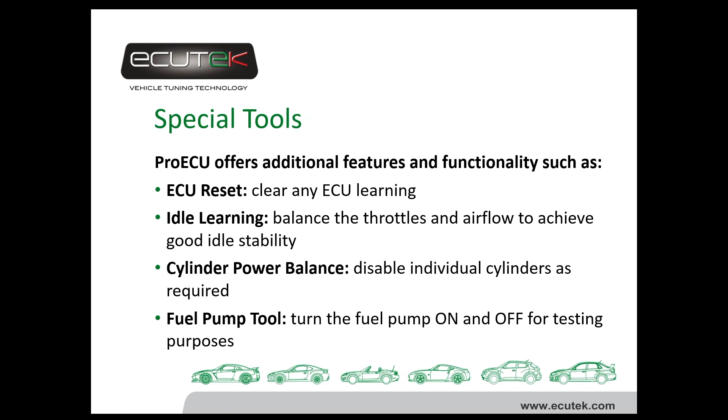The special tools menu is accessed from Tools, Manually Select Vehicle, Nissan 370Z and ECM Tools. You can see here quite a simple menu: ECU reset, idle learning and cylinder power balance.

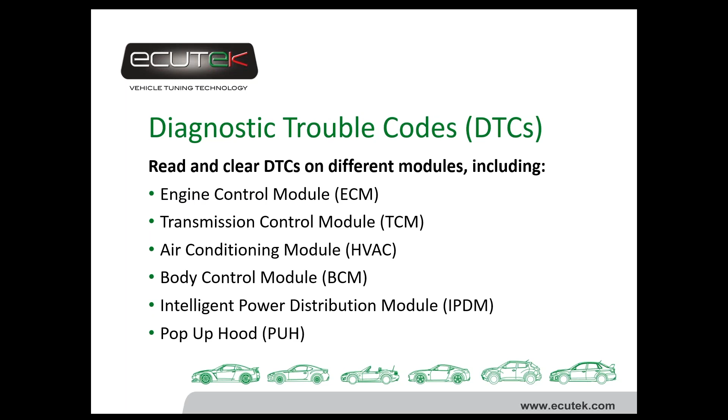ProECU also includes DTCs. We can read and clear DTCs on all the different modules on the vehicle: engine control module, transmission control for the automatic models, HVAC, automatic for the air conditioning, body control module, power distribution and the pop-up hood. This functionality is also included in the retail programming kits.

ProECU help is quite important. We spend a lot of time with the help files. They can be accessed directly from ProECU, or they can be accessed using Windows Explorer and going into the EcuTek ProECU help folder. The ProECU 370Z tuning guide has the map descriptions and most importantly the tuning advice. It's the sort of things that you tuners will be asking, and it's covered in the questions and answers, as well as more specific descriptions on setting up custom maps and which ROM to use. More in-depth questions are shown in the questions section.

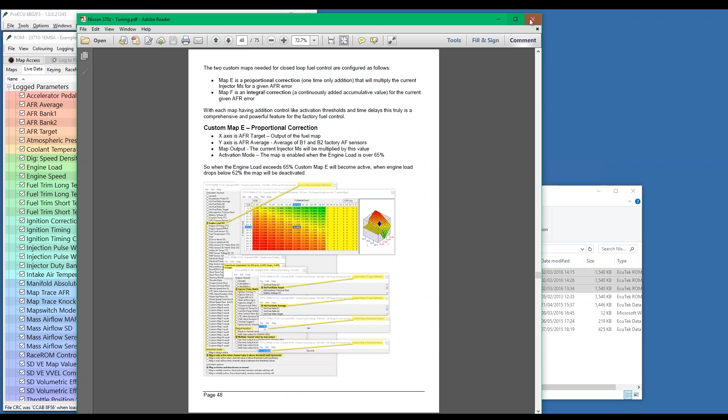For custom maps, there's a dedicated custom maps manual that covers custom maps. We can't put everything into the 370Z guide because some of the information is generic and may cover other products like the BRZ, FRS, GT86, the Subaru DIT and the Nissan GTR. We spend a lot of time writing the tuning guide and the custom maps manual, so please take some time to look through it. What we'll cover today is already covered in the tuning guide, so it can be used to cross-reference whilst the webinar is live.

RaceROM offers custom data logging. This is quite important. It enables us to log the ECU much faster than the factory Nissan protocol. We have a high-speed sampling rate of 50 Hz, 50 times a second. RaceROM importantly brings up to 70 new data logging parameters that are not available with the factory tool. The Nissan diagnostic parameters are pretty poor, and they don't even have things like knock retard shown. So the RaceROM parameters are very important to enable you to do good tuning.

The origin view shows at a glance whether you're logging an EcuTek parameter or a Nissan parameter. Many people are not aware of this functionality in ProECU, so when we're looking at the live data parameters here, if we right click on the name bar, you can add and remove certain fields. When we left click and add origin, we can see a new column has appeared, and OEM is a Nissan parameter, EcuTek is an EcuTek RaceROM parameter. If we click the tabs, we can order them in preference. So we can see here all the ones in red are EcuTek parameters, the ones in green are Nissan parameters.

This is the default logging view. If we close the default list and open all parameters, you can see all the ones in red here are the EcuTek specific parameters, and in particular all the custom maps ones are shown, and we lead on to

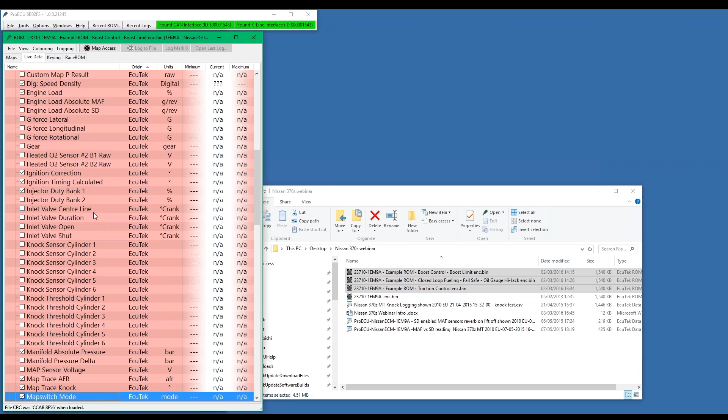more important parameters like per cylinder knock, the VVT and VTC and VVEL control, G sensors, engine load calculations, map tracing, torque demand values, steering wheel angle, and wheel speed sensors front and rear, as well as wheel slip ratio calculation. This is all done by ProECU, this is all done by RaceROM,

and is available to be logged as and where required. The default logging list again shows important parameters like injector duty, so we know if we're running out of injectors, map tracing, mass airflow calculated from the MAF sensor and also from speed density, as well as outputs of the SD map and the VVEL duration, compensation and the SD map.

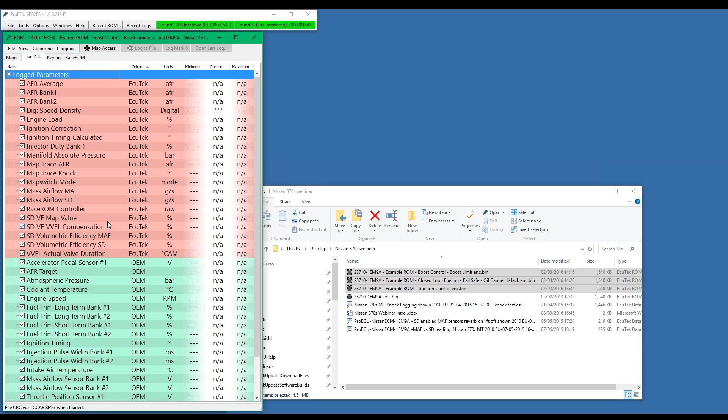Quite a basic level, but RaceROM feature files, the latest RaceROM feature files from a recent update are now available on EcuTek Update, and they're stored in the 370Z folder. We occasionally update the RaceROM feature files like we have done recently, and it's important that you use the latest version that's available from EcuTek Update. There's improvements, bug fixing and new features added, so it is important that you choose the latest one.

The latest version is currently version 2.1120. All the features added from the RaceROM feature file are shown under the RaceROM tab here.

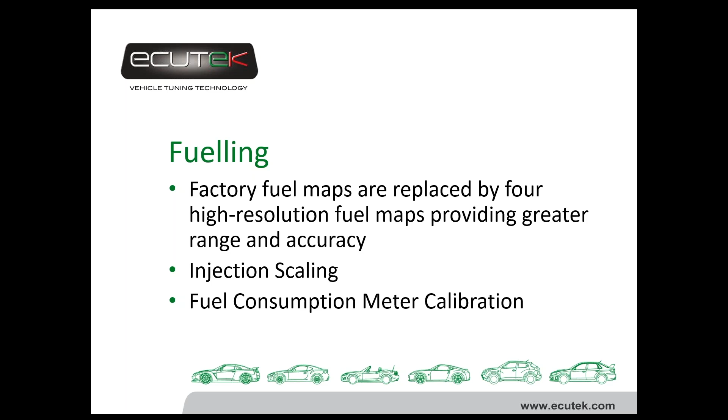Moving on to the maps, Nissan 370Z fuel maps. EcuTek's rewritten the fuel maps with 4 high resolution fuel maps. They can be used for greater range and accuracy. We have injector scaling, and we also have the fuel consumption meter calibration value. This will be used when we have larger injectors and should be recalibrated according to the size of your new injectors so that the fuel consumption display remains correct on the vehicle.

Maps by function. Fueling, we order by user level, and we can see the fuel consumption calibration byte is here, standard injector size. The high resolution fuel maps are significantly bigger than the factory fuel map, and you can see from this example at the top there is the factory fuel map, and then below is the RaceROM fuel map, and we have 4 of them, 1 for each map switch mode.

Not only is the map larger in size, offering more resolution, it's also got a higher engine load, and this value can be increased. So for forced induction cars, turbo and supercharged cars, we're no longer limited by the limitations of the factory fuel maps, the factory engine load.

Factory fuel map not used. As soon as we've applied the RaceROM feature file, this fuel map doesn't work anymore. Map switch mode 2, map switch mode 1 will be used by default. If you don't enable map switching, this is the fuel map that will be used.

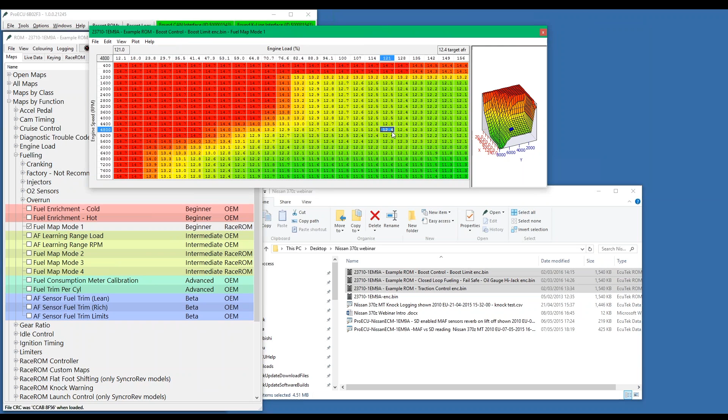We can increase the resolution of the fuel maps, how many decimal places we can see, by fewer significant points or more significant points. This is a shortcut key, Control F and Control M. So depending on the size of your screen, Control F for fewer, we can make it smaller, and more, Control M, we can see more decimal places.

This is quite important on larger maps, and especially maps which have a lot of resolution, and you might be looking at 4 decimal places. It makes it very difficult to visualize. One other thing you can do if you can't get the whole map on the screen is you can right click on the map and you can open it with a flipped axis. The map is now shown, X and Y have been flipped, the map shown the other way round.

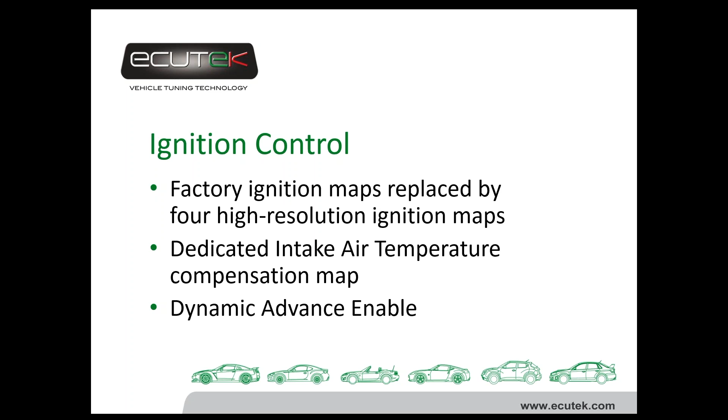Ignition maps. The ignition maps have also been replaced by 4 high resolution ignition maps. We now have a dedicated intake air temperature compensation map. We also have a checkbox for enable dynamic advance. The factory ignition has the ability to add ignition timing in the event of no knock. With the RaceROM ignition maps, we retain this functionality, and we can choose whether it works or not under the RaceROM section for enable dynamic advance.

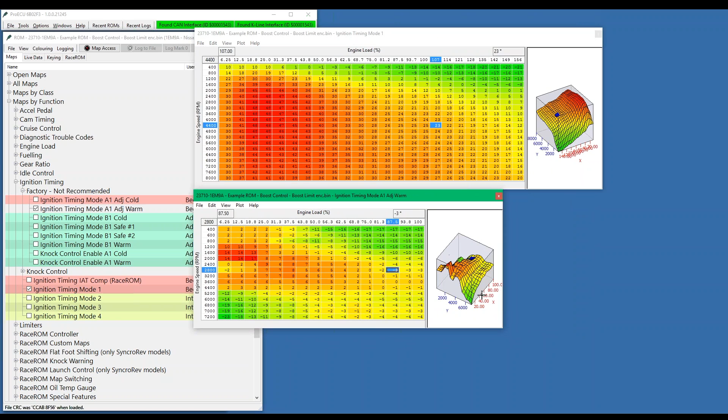The factory ignition timing maps are still shown, but they're not used. The factory ignition maps are based on cylinder pressure and flame front speed calculation, which means that the ignition map looks nothing like the final ignition table value you would see. So EcuTek has converted the ignition to real values, and they're the values that you will see on your ignition timing.

The factory Nissan values are an ignition offset. They're a compensation. The ignition timing is calculated live by the ECU, and then the octane adjustment map is used to adjust that final value. It makes it very difficult for calibration, so one of the very first things EcuTek did is rewrite the ignition maps and provide 4 large size high resolution ignition maps with real ignition timing values. Again, we have one for each map switch mode.

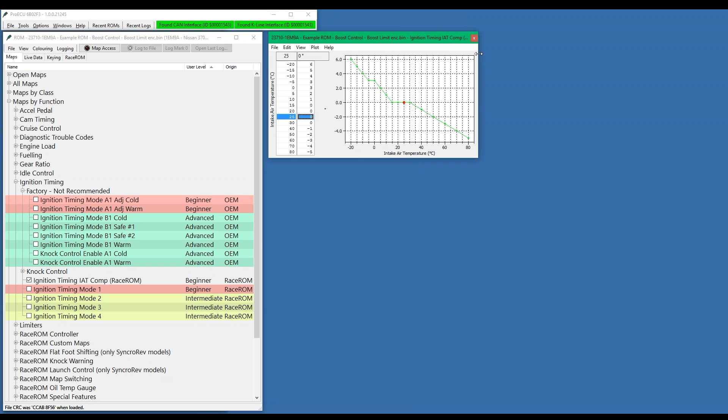We also have the ignition timing compensation for air temperature, so it makes it very easy with things like forced induction cars to apply ignition retard for high intake temps, or charge air if you're using a blow through situation. Showing again the size of the factory ignition map versus EcuTek's RaceROM ignition maps.

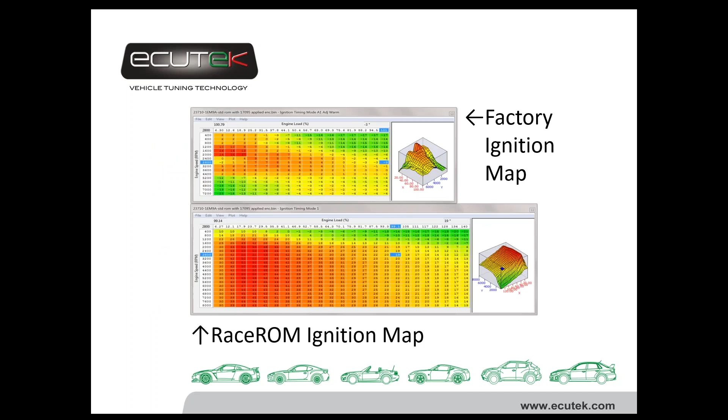Knock control. We've got 4 maps to enable and disable knock control against RPM and engine load. We've got per cylinder knock logging, we've got per cylinder knock threshold logging, and we've got per cylinder knock threshold map adjustment.

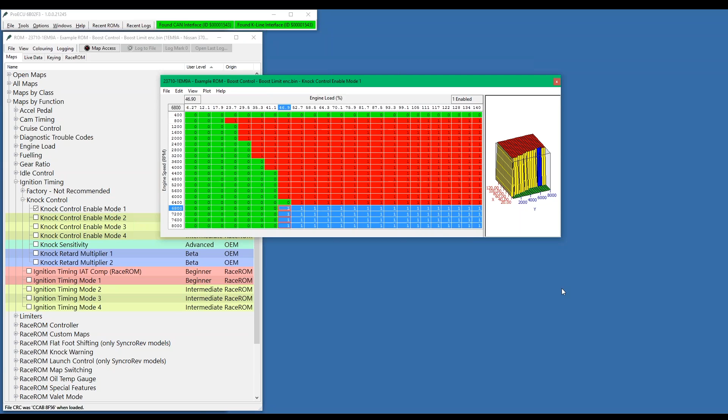The 0 indicates knock detection is turned off, and the 1 that it's enabled. So if you had a particularly noisy engine, maybe at high RPM, you can disable the knock correction at high RPM by changing the value from 1 to 0. The knock detection's not going to work now at 6,800 RPM. We've got 4 maps, 1 for each map switch mode.

We have knock sensitivity, so we can define the point at where knock is detected and when the ECU will start to retard the timing. I'm just checking the tuning guide for ignition timing. This is shown on page 33 of the 370Z tuning guide.

So what we can see here is the threshold, the yellow line and the purple line are the threshold for each cylinder. So we're looking at cylinder 4 and cylinder 5 in particular here, and you can see the knock noise for each cylinder is also shown. So that's the cyan colour and the red colour, and you can see that occasionally the red and the cyan have breached the yellow and the purple, in particular here around 2,900 RPM, and at that point when the threshold is breached, you can see the green line, which is knock correction, has become negative.

Now the reason knock correction is knock correction and not knock retard is because ignition correction can add timing in as well as remove it. So it's not knock retard, it's ignition correction. As the per cylinder knock for cylinders 4 and 5 breach the threshold, you can see the ignition correction becomes active and initially applies a -2.

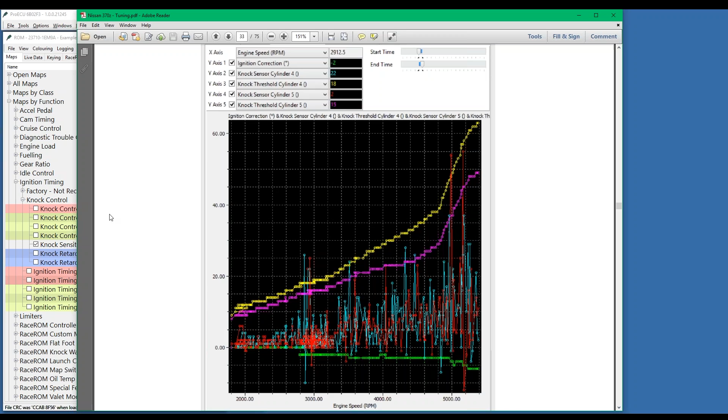Around 3,500 revs there's another knock event, and we can see the timing steps down further, and then at higher RPM around 5,000 we've got quite a lot of noise going on. We've got a big red there around 5,000 RPM, and you can see that the knock retard then steps down, probably -3s and -4s.

So what we're looking at here is the yellow and the purple line is the values here, and cylinders 3 and 4 have a higher threshold than cylinders 1, 2, 5 and 6, and this is because cylinders 3 and 4 have been filtered in a different way and are actually more noisy and need a higher threshold because they're surrounded either side by a cylinder. They're surrounded both sides, they're trapped in, so they have a higher threshold.

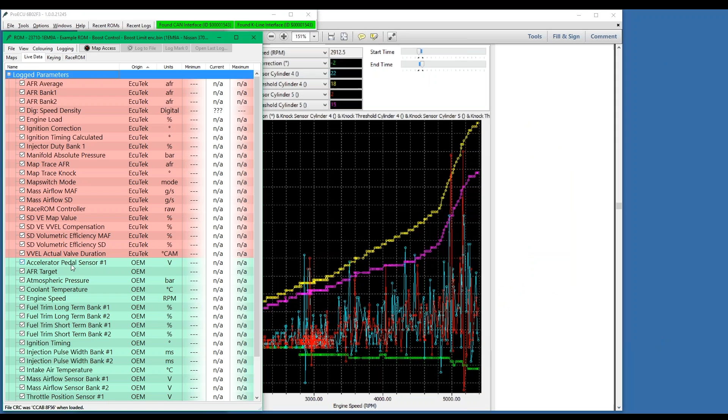So if in particular you've got one cylinder that's noisy, you can adjust them individually, although from my experience we generally increase all the cylinders by the same amount just to lift the noise, if we've got a built engine, maybe it's got pistons in it and they're just causing too much noise. Logging the per cylinder is a case of going into all parameters and going down to the per cylinder knock. So you can log the threshold of each one and you can log the knock of each cylinder individually.

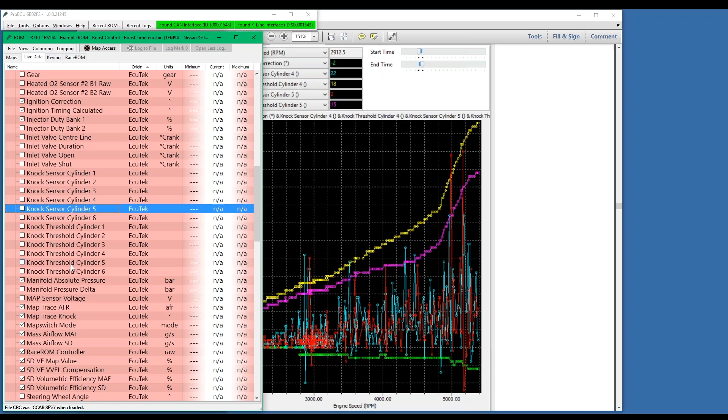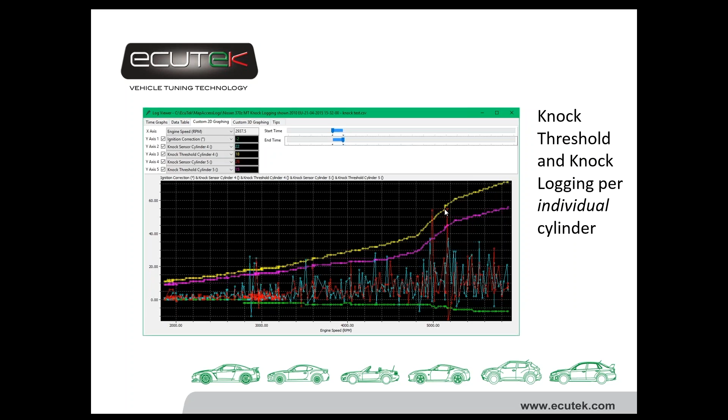Camshaft control. Now as we all know, the Nissan 370Z has quite an unusual cam control. It's got VTC, variable timing control, and VVEL, variable valve event and lift. So EcuTek's spent a lot of time understanding how this control works and provides very detailed control as shown in the screenshot here.

So there's certain maps that you'll see at the top here, cam timing, do not adjust. So these are the maximum advance and the maximum lift. As you can see from the description field that we've added in this screenshot, we do not recommend that you change these. If you change these limits, you're likely to have the valves hitting the pistons. So that's why these two maps have been separated out so that you can't over advance the time and you can't demand too much lift and risk damaging the engine.

So you can see from the VTC, the valve advance, that we have all the key maps that are needed to adjust the valve timing. You'll also see that the VVEL, we have all the VVEL maps required for tuning as well. The description defines how each map works and enables you to calibrate it as required during your tuning.

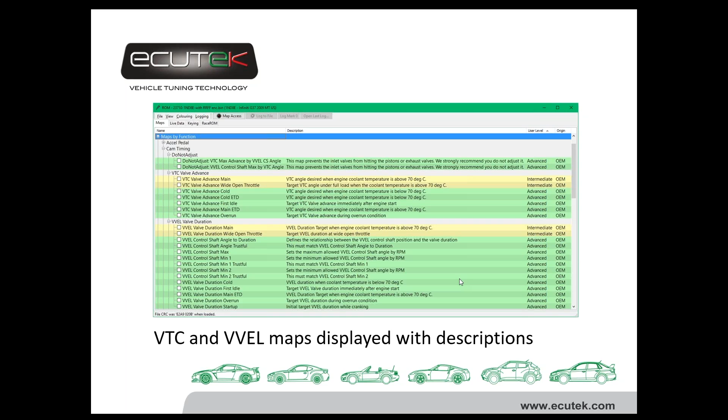Throttle control. EcuTek's defined the torque demand, so that's how much you ask for with the accel pedal. Torque actual, this is how much torque the engine thinks it's producing, and that's calculated from mass airflow and engine load. We've got a maximum allowed target for throttle angle, and we also have the accelerator pedal to throttle angle maps as well.

The importance of the torque maps is the torque maps are important for automatic transmission vehicles. Changing the demand is not really going to make the car any more powerful. Ultimately the car is going to produce what it does, but the torque actual map is very important for gearbox control. The main issue that people will face is that when they have something like a larger MAF tube and the airspeed is slower, if the MAF scaling is not accurate, then the engine load will not be accurate and the torque value given to the gearbox will not be accurate.

Basically, if you reduce these values by 30%, the automatic gearbox will become sloppy, it will slip, it won't lock up properly when you're changing gear. If you increase these values, for example, by 30%, the gearbox change will become very hard, very positive, locking up, and feel more binary, more on and off, like we have a racing clutch, for example.

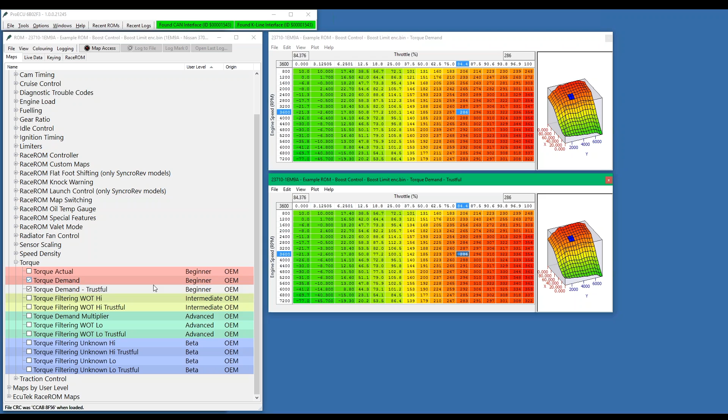Just incidentally, when there's a trustful map, just as in the Nissan GTR, we have to set both maps the same. So if you do change torque demand, you must change the trustful map to be exactly the same. The ECU's checking both the maps, and if one of them is different, you're going to get a fail-safe condition and a DTC.

There's a torque multiplier map, torque demand multiplier, which will multiply the value coming out of the torque map, and that's used particularly at low speed to increase the torque output to ensure the gearbox is locking up quickly and tighten up the torque converter so it doesn't slip too much. You saw in the screenshot that we have a description field describing how the maps work.

There are additional maps here in beta. The torque control is very detailed. We spend a lot of time and effort understanding the control, but there's just some conditions that we can't define each time. So quite often if you find that the throttle doesn't open fully, then it's likely to be one of the other maps in the ECU

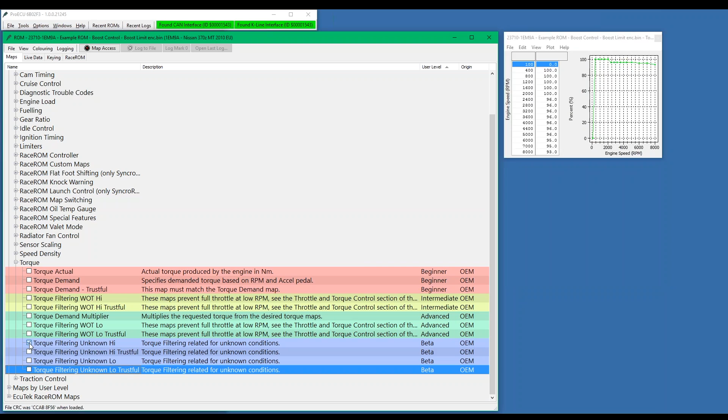that could be used. This could be something on an Infiniti, maybe a Q40, Q60. So if you find that the throttle's not fully opening on your Infiniti for some reason, there's a good chance that it's using the second set of maps, and that's why they've been included in the software so that they can be adjusted as required.

Okay, I'm just looking on the tuning guide to see what page this is on.

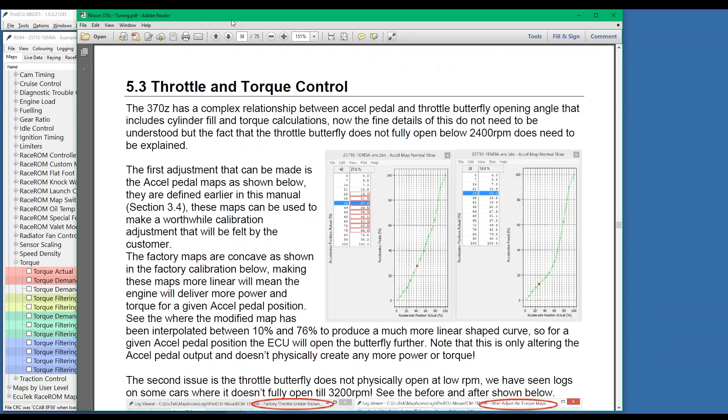Okay, so that's page 38 of the tuning guide, and you can see where we've adjusted the torque maps, the torque filtering maps, and also the accel to throttle maps. So as we go back, excuse me, so page 38, the torque control defined, the screenshot we've just seen in the presentation, and the torque filtering maps. Throttle target maximum and the torque filtering. Throttle target max, the threshold that stops the throttle opening fully.

You also see there's relationship maps between accel pedal and butterfly opening, and in particular, which is the one, why Nissan make it so complicated I do not know, but basically this is the relationship between the accelerator pedal and the butterfly opening, and you can see that the relationship actually creates a concave map. Now it's not the best tuning in the world, but as an example, if we were to interpolate between these two, you'll see the map becomes very flat, and you'll see that for 35% accelerator pedal, instead of the butterfly being open 15%, the throttle butterfly will now be open 27%.

It's a trick that some tuners use, and it can make the car feel faster, it can give a better response. It can also be used on forced induction cars, on supercharged cars, on turbo cars. If you're getting too much boost at lower RPMs, you can use the relationship between the accel pedal and butterfly opening to stop the engine creating too much torque at part throttle conditions and at full throttle conditions if you need to keep it back.

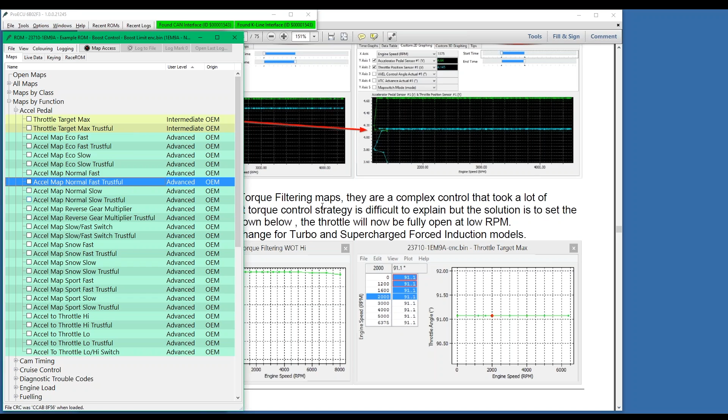Moving on to RaceROM. So RaceROM has many special features. Applying the RaceROM feature file will enable us to have four-way map switching, adjustable launch control, flat foot shift, auto blip, valet mode, knock warning, and per gear rev limits. We also have high resolution ignition and fuel maps, injector scaling for each mode, oil temperature gauge hijack, speed density, custom maps, and fast flash.

So moving on to the four-way map switching, we can create 4 different ignition and fuel maps depending on the map switch mode. We have instant four-way map switching using the cruise control toggle or the mode integration button, normal, eco, sport and snow on certain Infiniti models. When we are map switching, the rev counter shows what the current map switch mode is that's selected. There's a video of this on our website and our YouTube channel.

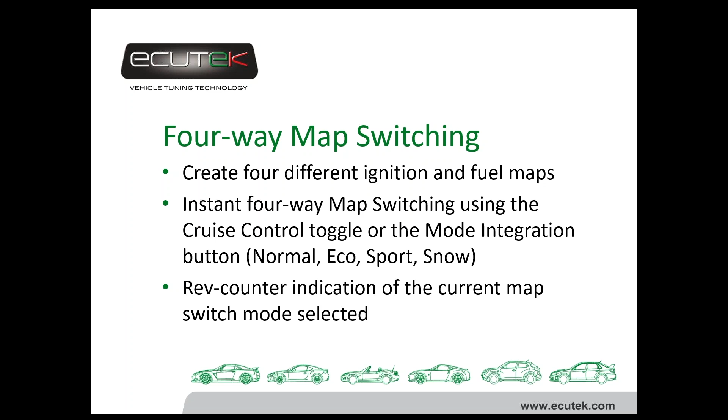ProECU has been configured to make it easy to navigate using the cursor keys, so you'll see that I'm quickly moving around the menus using left and right to open the tree, and we're going to go to map switching. Right, we're going to go down and we can use the space bar to open the map and space bar to close it again. So this is where we enable the map switching. By default it's configured to use the cruise control buttons. On the Infiniti we can use map switching against the driver mode integration, so the normal, eco, sport and snow, and you can see the number will indicate which mode we're in.

And we can also change how many modes we want enabled. So default is mode 1, no map switching, and we can choose if we want 2 modes. Maybe we want one for race fuel, maybe for ethanol, maybe we want a valet mode, a detuned mode if somebody else is using the vehicle. Simply enable and disable the map switching in this menu.

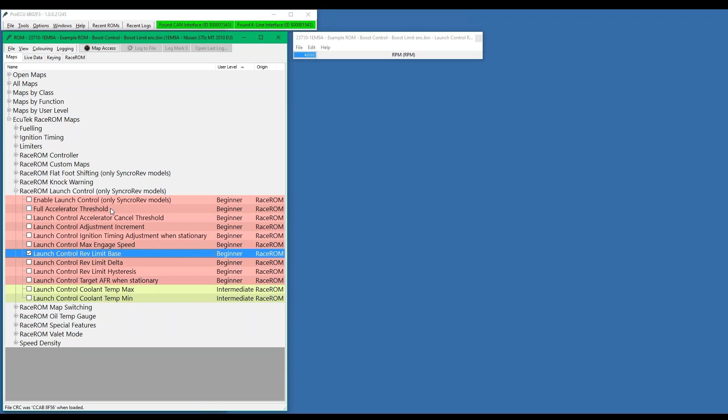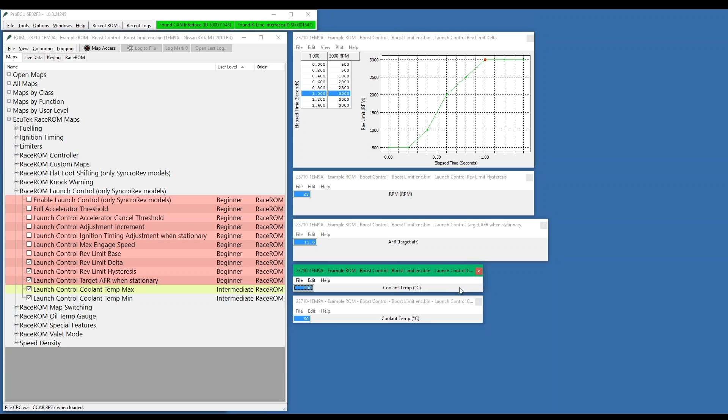This is the change in RPM against time after launch. Time is the left-hand column and the RPM is the right-hand column. This can be used to create a progressive launch. The hysteresis between the launch RPM is 25 RPM, the on-off amount, and the target AFR pre-launch is 11.6 AFR. We can also ensure that the launch control is only allowed to be enabled when the coolant temp's over 60 degrees and below 100 degrees. If you want to change these settings, you can simply change these in ProECU. Right click, close all maps.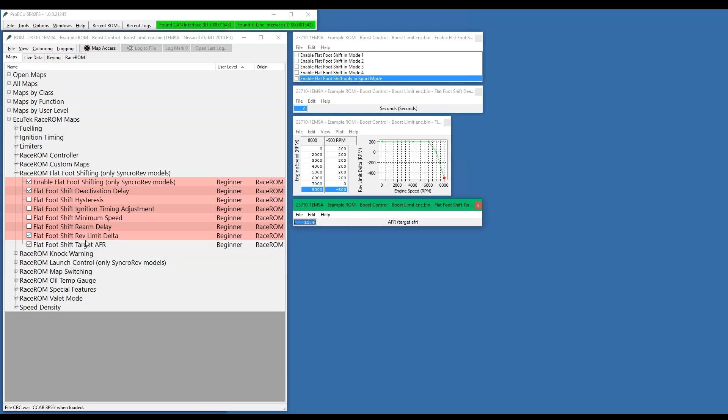Flat foot shift will not work below 40 kilometers an hour. We have a rearm delay of half a second, so that half a second has to expire before we can rearm the flat foot shift. We have an RPM delta when we enter flat foot shift, how much the current RPM will change, and typically it will increase. If we were at 4,000 revs to a flat foot shift, the RPM will go up to 4,200 RPM and be held there. At higher RPM this comes down nearer the rev limiter, and if we're over the rev limit for any reason and a flat foot shift is performed, then it will wait for the engine speed to reduce before the injectors are restored. We can also control the air-fuel ratio during the flat foot shift, and the target is again 11.6, keeping the air-fuel ratio nice and rich during the shift.

Auto blip is not a feature available on the 370Z on most models. It has an auto blip feature as standard from Nissan, and the SyncroRev models will in sport mode automatically blip the throttle during gear shift. Valet mode enables us to produce a low power mode for when the car's out of our control. Maybe if it's been given to a girlfriend or one of our children and we want to reduce the power, maybe a friend of ours, we want to turn the power down, we can simply put it into valet mode and it will reduce the power. We can set valet mode up. It's configurable for speed, torque and distance.

The latest version of RaceROM valet mode is much more simple than the previous version. You can enable valet mode with the checkbox here. We have the speed limiter and the torque limiter against distance, so we can configure this as an anti-theft mode as well if we wanted to. To enter the valet mode, we simply go into map switch and we map switch all the way around to 8,000. When the rev counter goes to 8,000, it's valet mode enabled. To come back, we simply go into map switch, come all the way back to 3,000 or 4,000 RPM, mode 3 and mode 4, and we're back out of valet mode.

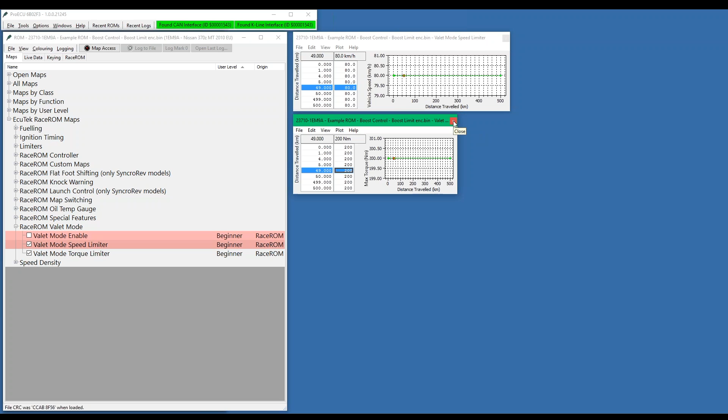We have a knock warning and a per gear rev limit. So the knock warning will flash the check engine light when a knock event occurs. The knock value can be calibrated by the tuner in software. We can set a different rev limit in each gear. This could enable us to stretch the engine slightly more in first and second gear to hit critical 0 to 60 times. We can also configure a different set of per gear rev limits for each of the map switch modes.

Knock warning: simply enable knock warning, and the threshold, so 3 degrees of retard. So if the ECU was to retard the ignition timing and the ignition correction was to show -3 or greater, then the check engine light will flash for a few seconds. Limiters: we have a per gear rev limit, one for each gear and also a set of one for each mode. The thresholds are on and off for the RPM.

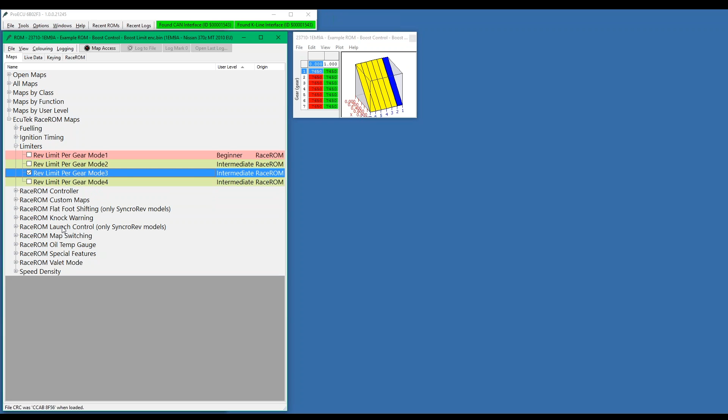As discussed before, RaceROM offers 4 high resolution ignition and fuel maps. The ignitions are 24 by 20 versus the factory 16 by 16. We've got a new 2D air intake compensation. We've got the 4 high resolution fuel maps. They are now 24 by 20 versus 8 by 8 for the factory fuel maps, so a lot more resolution there. And we've got the 4 injector scaling values providing simple ethanol calibration.

So fueling, injector scaling: we have a different injector size for each map switch mode. So we could say map switch mode 2 is calibrated for ethanol, and we can change this injector size accordingly to get 25-35% more fuel as required.

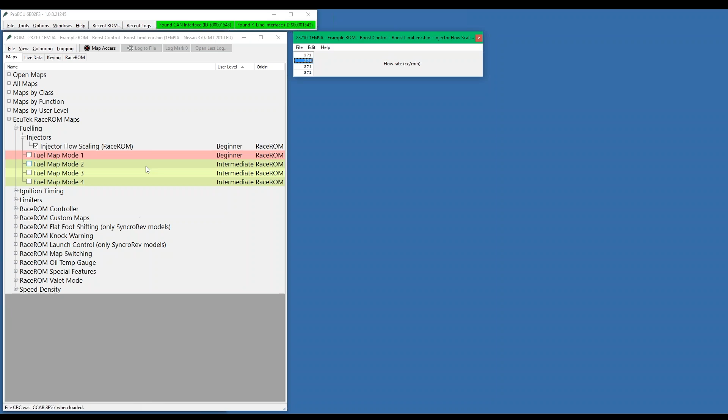Oil temperature gauge hijack. EcuTek offers you the ability to drive the oil temperature gauge that's shown in the center console on the top of the dash there. So we can drive the oil temperature gauge either during map switch or all the time. We can use the oil temperature gauge to show fuel trims, air-fuel ratio, lambda, or ethanol content ratio.

I have a small video to show you later. It's actually on our YouTube channel, but it will show you our 370Z showing fuel trims and AFR, and it will take around 2 minutes, so I'll save that to the end. So we can also use the oil temperature gauge to show boost pressure, maybe a target pressure using the RaceROM controller. So we've got a lot of functionality for the oil temp gauge.

One of the key things to mention here with the oil temp gauge is the US cars are in Fahrenheit, and I think it starts at 130F to 240F, something like that. So it doesn't work as well as the European cars, which use Celsius, where we go from 70 to say 150C, where things like fuel trims, when the gauge is set at 100, it's a bit more relevant to what the real fuel trims could be.

But that doesn't mean that we can't use the US gauges, and if somebody was super keen, they could make some new gauges. There's lots of companies out there that will make new fascias, or source a European or JDM oil temperature gauge which has a new fascia on it. It's certainly possible. With such a cool feature showing things like fuel trims, AFR or ethanol content ratio, it would be good to make some gauge overlays, and anybody who does make some, please let us know, because I'm sure other people would be interested in buying the gauge overlays.

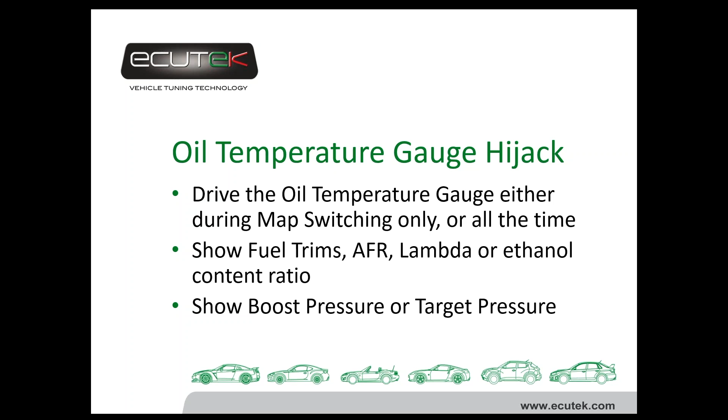Hybrid speed density. EcuTek offers speed density for the Nissan 370Z. It's a 24x21 volumetric efficiency based map. Its axes are engine speed and manifold absolute pressure. The VE calculation is against charge air or intake air, and you can define which one it is.

We've got a VVEL compensation for accurate part load calibration. Without the VVEL compensation, we simply can't have speed density. As far as I'm aware, nobody else offers speed density on the factory ECU for the 370Z, and we are the first. It was a lot of work to do it, but to understand the throttle control on the 370Z and the VVEL control at part load condition has enabled us to produce a successful speed density map that works as expected.

Not only do we have speed density, but we also have a hybrid option where we can run MAF and speed density. So maybe we have MAF at idle, light load, and then we switch to speed density at higher load, maybe on boost, or we start off with speed density due to poor MAF design. Maybe we've got something like a compressor turbo affecting the MAF signal at low RPM or idle.

Maybe the MAF's just too big, the airspeed's too slow to read accurately, so maybe we run speed density at idle, and when we start to get onto load we switch to the MAF sensor. And we can switch against RPM, we can switch against mass airflow or manifold pressure. We can define one or all of them to switch the condition.

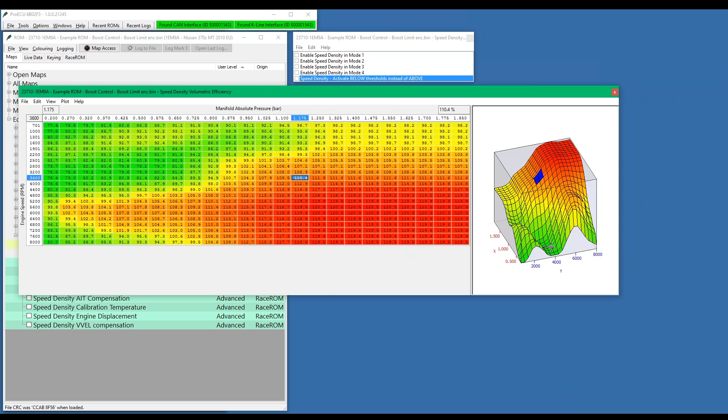The latest RaceROM feature file has a new calibration, and we've made some improvements in the speed density calculation, and the latest version has an updated speed density VE map, and you'll see the values in the SD map are now more what you would expect them to be, typically for the efficiency of the engine, certainly an NA engine. Again, this map's getting quite big, quite hard to visualize. Control F for fewer significant points will reduce the map and make it easier to see the values. More significant points makes it bigger, more difficult to fit on the screen.

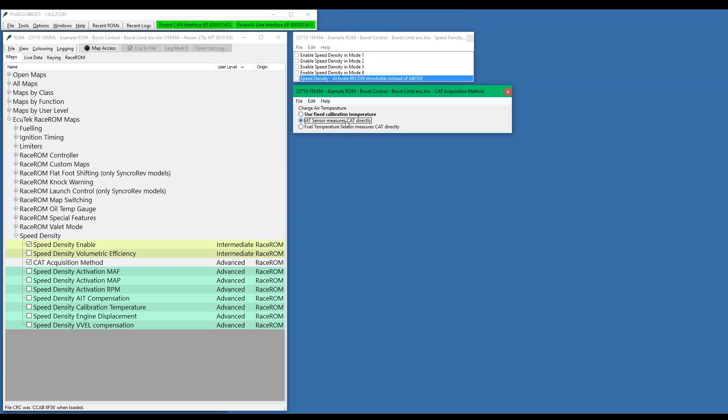You can tell RaceROM, what are we doing for charge air temperature? Do we have a fixed temperature calibration? If we're calibrating the engine, we would choose this. We're going to say intake air temperature measures charge air directly. So if we're telling the ECU that intake air is charge air, then we don't need to guess what it is, so we don't need this map to do anything. Oh, missed one. F1. So if intake air is measuring true charge air, then we don't need to guess.

But if we do not have charge air, then we'd use the fixed temperature. So that means our speed density map was calibrated at a set temperature. In our example, we calibrated the speed density map at 20 degrees charge air temp. So our base calibration was done with a 20 degree charge air temp. Now, if we cannot measure charge air, then we have to guess what it will be. So this is what the compensation map is. We know what air temp is because we've got an intake air temperature sensor.

So what we're saying is if the intake air temperature is 50 degrees, then we're going to reduce the speed density calculation by 0.92, which is like 8%. So we'll have 8% less engine load, so that's more advanced ignition and less fuel. So make sure I say that the right way around. If the intake air temperature is -10, so it's much colder, we're going to multiply the speed density calculation by 1.13, which will add more fuel, and it will also retard the timing more. It's based on engine load, not just on the fuel volume, so that's an important point to note there.

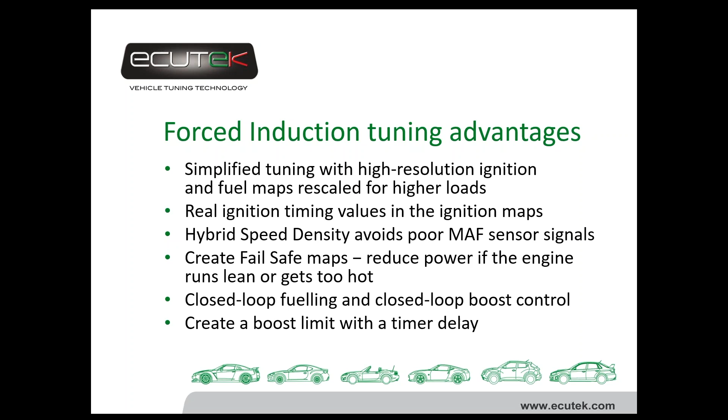Using custom maps, we've got 16 new 3D maps for you to configure however you want. You can create what you want the new maps to do. You can create compensation maps for pressure, temperature, speed, gear against fuel, ignition or boost. These are just a few of the possibilities. Set them up to work in any or all of the 4 map switch modes and set additional configurations for ESP or sport button settings. We'll go through this in a while.

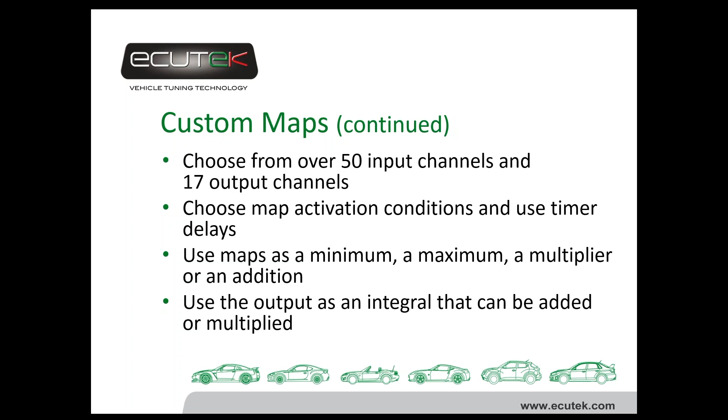With custom maps you can choose from over 50 input channels and we have 17 output channels. We can choose map activation conditions and we can use timer delays. We can use custom maps as a minimum, a maximum, as a multiplier or as an addition. We can use the output as an integral value that can be added or multiplied. So custom maps, create any map that you want.

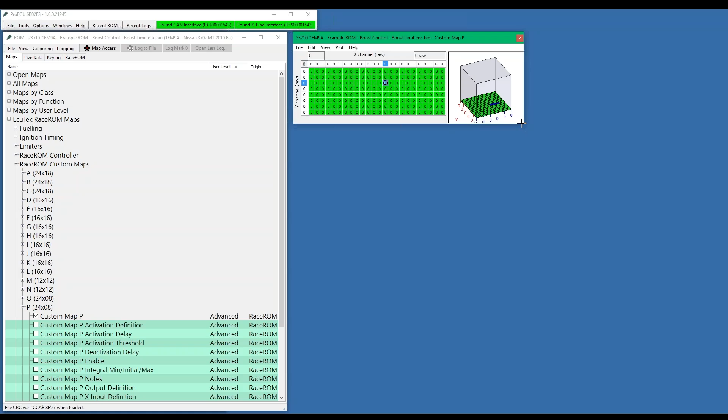I'm just quickly going to open a custom map and discuss the various options before we go into how they work. So we've got 16 custom maps. Bad example because this is an example ROM, so it's already been configured. Let's see which maps we have free. So maps A to maps O have been predefined. So if we choose map P, it's blank. Map P hasn't been configured. We've got zeros in the map, we've got zeros in the X and Y axis. So we tell ProECU what we want it to do.

Let's make a very simple ignition retard for vehicle speed. So let's say we want the X-axis to be vehicle speed. So we will go down, we will say vehicle speed. Control S for save, Control Q closes the map. And we're going to say Y-axis is going to be, let's say, coolant temperature. Control S, Control Q. So coolant temperature, so we say minus 40.

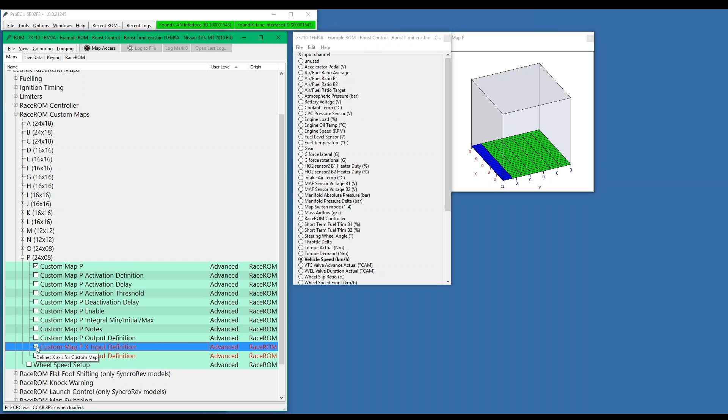Oh, I seem to have some funny function keys. There we go. 120. Minus 40. Okay. And we said this is going to be vehicle speed. So let's say 200. 200. Control I, and we save and close.

So very quickly we have vehicle speed along the X-axis, we have coolant temperature on the Y-axis. So maybe when the vehicle is going very fast and the engine temperature is very hot, we want minus 3 degrees. Maybe up to 160 kilometers an hour we don't need any more retard, but if we're 120 coolant temperature, maybe we want minus 2 degrees there. Not the best example of a map in the world.

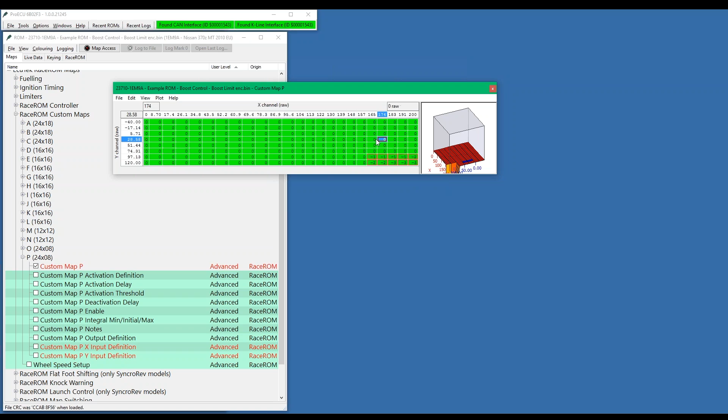Below 90 degrees we don't want it to do anything, so maybe we would interpolate like this, and let's have a look. So what we've just created here is 120 degrees coolant temperature. What we probably do is make that one 110.

100 like this. So it's a bit more progressive now, but we would say at 110 degrees coolant temp at 200 kilometers an hour we will move 1.5 degrees. 120 coolant temp we'd move minus 3 degrees. We have created a map, so we have minus 3 in there, and we're going to say, what is the map going to do? We want it to be ignition timing, so we choose ignition timing, and we want to add the value to the ignition timing.

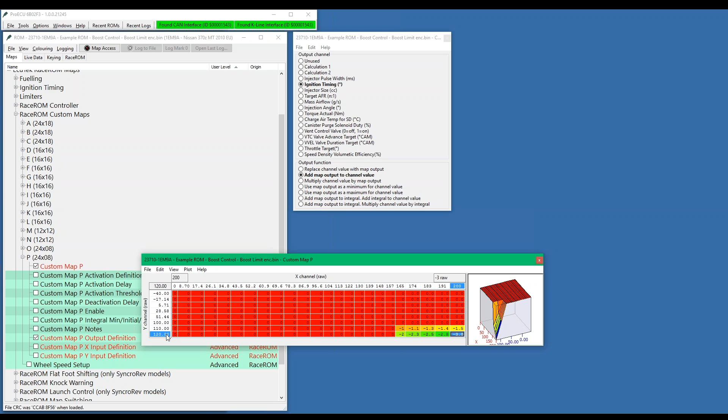So now we will add -3 ignition timing if the vehicle's over 200 kilometers an hour and the coolant temperature is 120 degrees. That's the simple basics of how easy this is to do. So we may want to define what the map is. We're going to say add retard at high RPM and high coolant temp. Okay, so we've now got a record of what this map is doing.

But maybe we don't want this map to work all the time. So we're going to say this map only works on accelerator pedal, and it's only going to work when we're on full throttle. So we're going to say 4 volts, and we're going to say 3 volts.

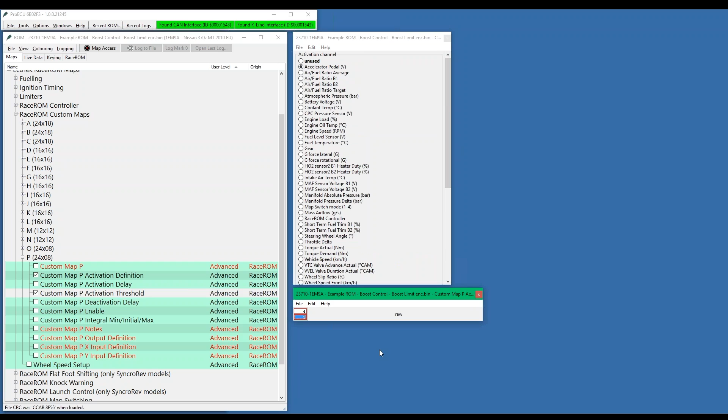So the activation for this map to be allowed to work, the activation is accelerator pedal voltage, and the threshold is the top value. The threshold is 4 volts, so the map is only allowed to work over 4 volts accel pedal voltage, and it will stop working when it drops below 3 volts.

We also have some other settings. The map is always active. We need to set this map as it's only active when it's above the threshold, and we want the map to activate and deactivate as normal.

We don't want it to be initially inactive and then once activated that it stays active until we turn the key off. That might be something like if we had a drop in oil pressure, some fatal condition where as soon as oil pressure drops below 1 bar, over 5,000 revs, we want to turn the engine off instantly. That's the sort of functionality that we have with custom maps.

We also can add a delay. So we say, okay, the map's going to become active. Let's wait 1 second before the map becomes active. These activation and deactivation delays are useful for things like fuel cuts, boost limits.

And we also have to tell ProECU when the custom map's allowed to work, which mode it's allowed to work in. If it's in debug, the map cannot work. You'll be able to log the output, but it will not physically do anything. So we need to uncheck debug, and we say we want this map to work in mode 1, 2, 3 and 4. But we might also say we only want this to work when the ESP is turned off. In this particular example, it wouldn't be a sensible choice, but we do have the control to say this is only allowed to work in certain modes.

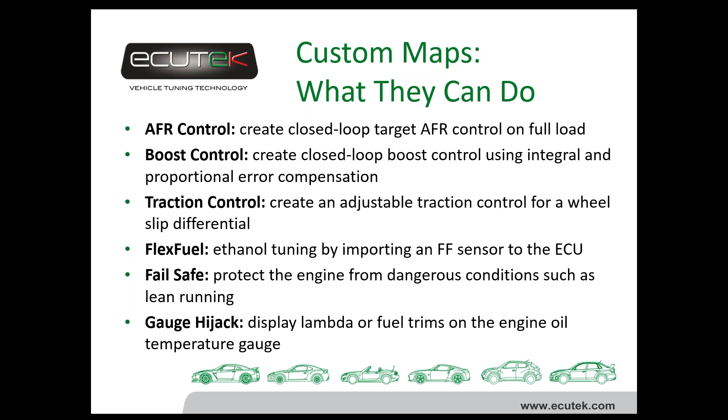So we have produced some example ROM files that are on EcuTek Update. You should have downloaded them and they'll be found in your 370Z folder. The first one that we're going to go through is documented in the 370Z tuning guide. As I flick through the manual here, closed loop fueling is shown on page 47 of the tuning guide, and we're going to show you how to create a closed loop AFR target on full load and how to use proportional and integral compensations.

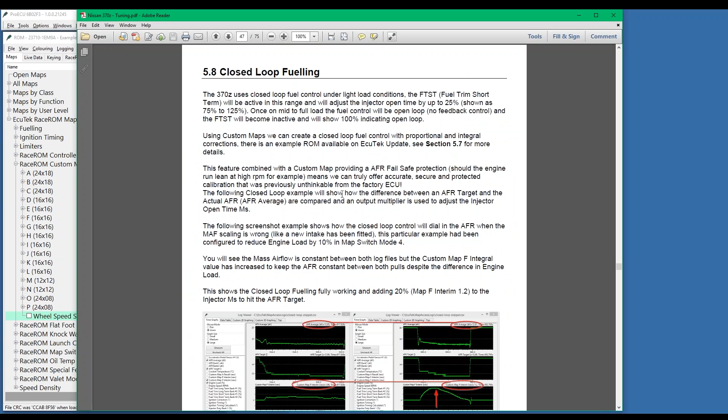So, page 47 of the tuning guide, section 5.8 defines how to create a closed loop fueling on full load, and the example ROM file found on EcuTek update has the map already created. So as we go through, custom map E, custom map F, define this control. So the ROM file we currently have open is the boost control and boost limit example ROM.

So I'm just going to close that one. I don't want to save the changes I made. This is the traction control example ROM, and this is the closed loop fueling. So the example ROM is based on our European model 370Z, but you can copy and paste the changes into any of your 370Z or Infiniti ROM files.

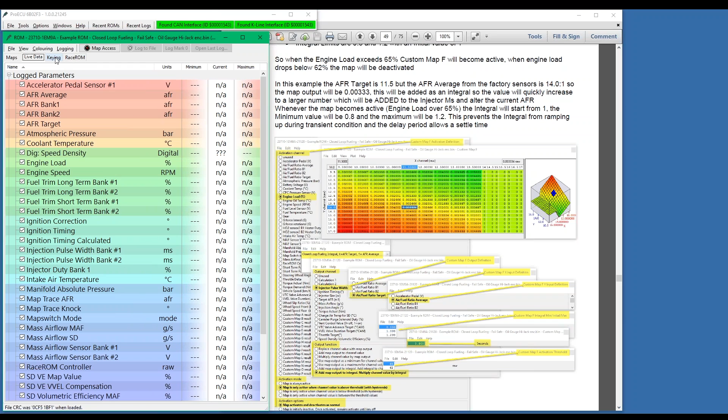Under the keying section, we've defined the custom maps that have been calibrated and what they're doing. These will cross-reference with the tuning guide and also obviously this webinar for future reference. So custom map E and F are the proportional and integral for closed loop fueling. So we go to custom maps, custom map E, and we open the notes and we can see

custom map E is the proportional compensation for AFR error. X-axis is the AFR target and the Y-axis is the AFR average. So we open custom map E and we can see the X-axis is AFR error, so that's the difference between bank 1 and bank 2, and the Y-axis is the AFR average.

So sorry, the Y-axis is the actual AFR coming from the sensors and the X-axis is the AFR target. So this is what's coming out of the fuel map. So on page 48 of the tuning guide, X is the AFR target, so the target is 12 to 1. This comes out of our fuel map, and the current AFR coming from the factory AF sensors is 13 to 1. So the current AFR is leaner than our target.

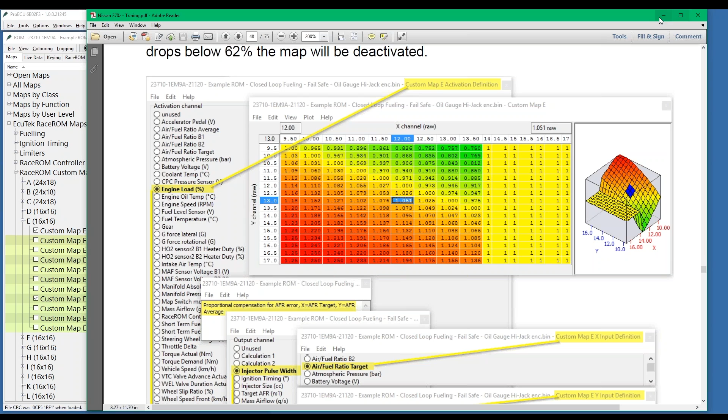So let me just check. So we've documented each map in the presentation. So custom map E is the closed loop AFR on full load, and the map output is a proportional addition, a multiplier, proportional multiplier to the fuel injector size.

Okay, so when we go to map output, we can see that the output is injector pulse width and it will be multiplied. So in this particular instance, we can see the target AFR is 12 to 1, the actual AFR is 13 to 1, so the injector size will be multiplied by 1.05, which will open the injector for longer and make the car richer.

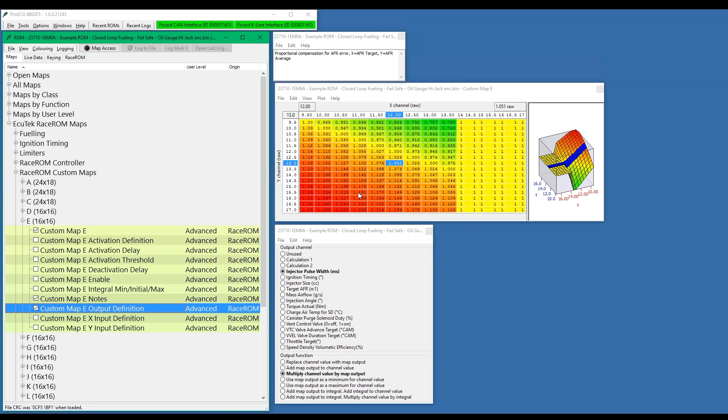So you can see from the activation for this closed loop fuel map to be allowed to work, it's based against engine load, and this custom map is only allowed to work when the engine load is above the threshold. So what is the threshold? The threshold is 65%. So whenever engine load is over 65%, the closed loop map's allowed to work, and whenever it's below 62%, it will not work.

There is also a delay of 0.3 seconds before the map is allowed to work. Again, the map by default in the example ROMs is not enabled. If you want it to work, you disable the debug and you choose the map switch mode that you'd like it to work.

So switching back to the presentation, custom map F is the closed loop AFR integral map. So these values are much smaller. So the proportional is a one-time only multiplication for a given AFR error. The map F is an integral map that will continually adjust the injector size output until you hit the target.

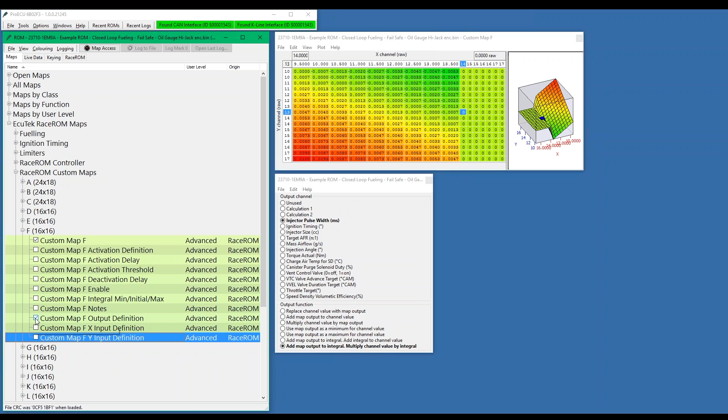Okay, so this is added to the pulse width, it's not multiplied. The x-axis is the target AFR and the y-axis is the average of what's coming out the factory AF sensors. And we also have an activation. So the map is only active when we're above the threshold, and the threshold again is engine load. So the map is only allowed to work, there's a delay of 0.3 seconds again before it becomes active, and it's 65% engine load. So the integral value again will only work over 65% engine load, and it will stop working when it's below 62% engine load.

Most importantly on this map is the integral, because they're continuously added, they can ramp up or down in unwanted conditions. So we can specify how far these maps can go, and the integral minimum and maximum being configured at 0.8 and 1.2. It's the maximum range that it's allowed to have, 20%. You will see on page 47 of the tuning guide.

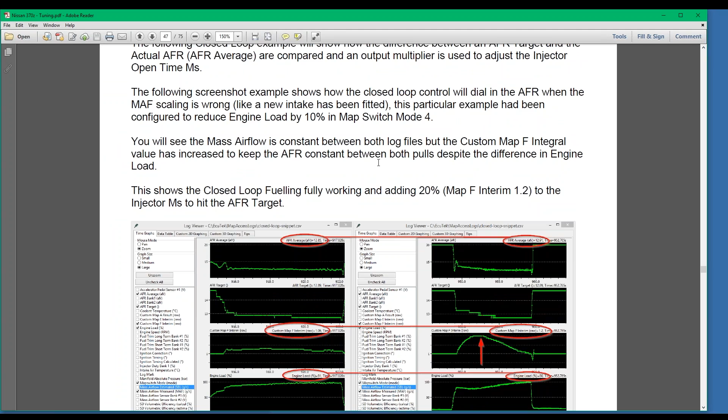So this is where the engine load has been reduced by 10% in map switch mode 4, and you can see the mass airflow is consistent between both logs, but custom map F, the integral value, is ramped up to keep the AFR constant between both pulls despite the difference in engine load. So what we can see here is the difference between the two pulls.

The AFR is very similar, 12.8, 12.9. AFR target, 12.89, 12.89. And the integral value is 6% on the first test, and it's 20%, 1.2 on the second test. But you can see that the engine load for the purpose of the test, initially it was 91%. We've calibrated it so it dropped to 80% to make the car run lean, but you can see the closed loop integral value is ramped in to correct the target AFR when map switch mode 4 is enabled, whereas previously it was map switch mode 3.

But you can see the mass airflow reading is consistent between both runs, 174, 173, proving the car still had the same airflow. So we can see there when we affect the engine load on purpose, for the purpose of the test, that the closed loop fueling is just dialing in the AFR and hitting the target that the ECU has in the fuel map. So that's on page 47 of the 370Z tuning guide.

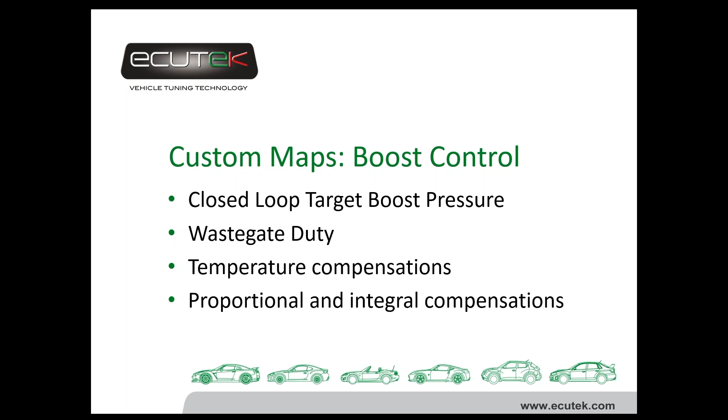Custom maps closed loop boost control. So closed loop boost control target, we have a target boost pressure, we have a wastegate duty, we have temperature compensation, and we have proportional and integral compensations. In the example ROM, which is on EcuTek update, the closed loop boost control is defined on page 51. And we can see custom map I has been configured.

The x-axis is accel pedal, the y-axis is engine speed, and the output is a target boost pressure that will be stored as a calculation. It's boost pressure in bar, but it's just being stored. We need a target, we need a manifold pressure to aim for so that we can correct the pressure. Custom map J is a temperature compensation. The x-axis is coolant temperature, the y-axis is air temperature, and the output multiplies the current target boost pressure. So when the value is 1, the target boost pressure will not change.

So between 60 degrees C and 110 C, and between 5 degrees intake air temp and 40 degrees intake air temp, the target boost pressure will not change. But should the coolant temperature be below 40 degrees or the air temperature be below 0 degrees, then the target value will be reduced accordingly. So here's a temperature compensation for coolant temp and air temp. This could be altitude, could be wheel slip. There's all sorts of things you could use here as a compensation. So custom map J is our compensation.

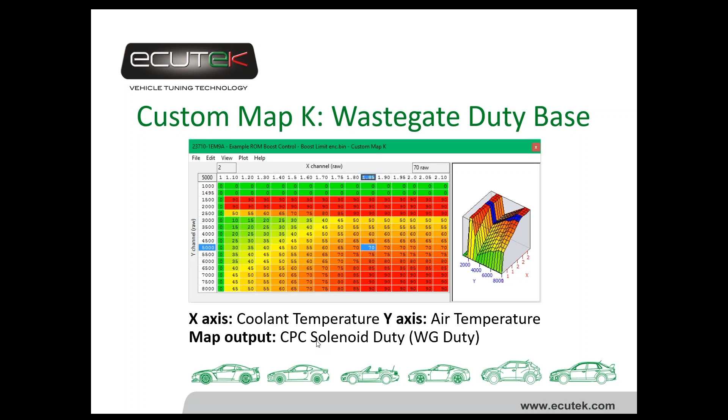So map K, the input, the x-axis is the output of map J, calculation 1. The y-axis is actually engine speed. I need to update my slide. And the output is wastegate duty, which will actually be the CPC solenoid duty. So that's defined on page 52 of the tuning guide.

Map L creates a boost error calculation. We know what the current pressure is and we know what our target is. If we compare the two, we get a differential pressure. So in the example on page 53 of the tuning guide, you will see at the top of page 53 that the x-axis is the actual boost pressure and the y-axis is the target pressure.

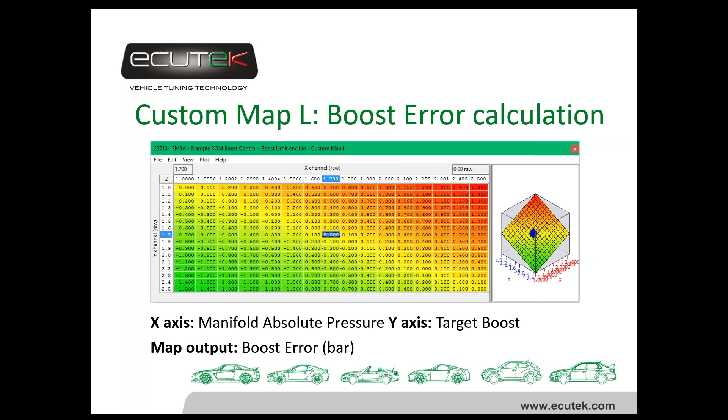The actual boost is 1.9, the target is 1.8. That gives us a pressure difference of 0.1 bar. So the output of the map would be 0.1 bar. So output of map L is boost error. Map M is our wastegate duty proportional compensation. So it compensates the wastegate duty for a given boost error.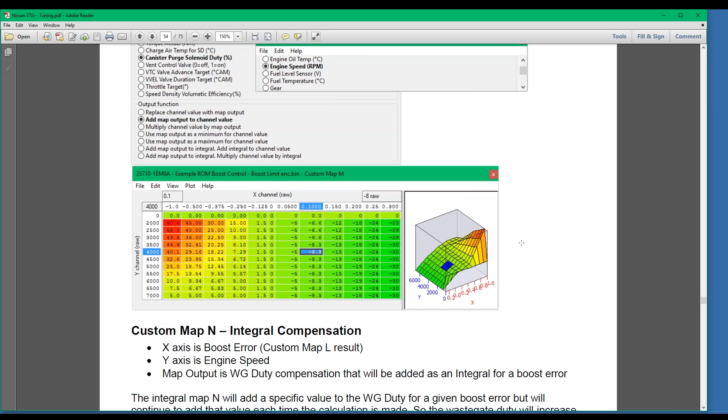So the output of this map would be minus 8.3, and as it's a proportional map, if the current wastegate duty was 50% and we have a boost error of 0.1 bar, then 50% wastegate duty would be reduced by minus 8.3, so that would go from 50 down to 41.7.

And you can see it's a minus 8.3, and the output of custom map would be to add the CPC solenoid duty, which is our wastegate duty. We've got a wastegate solenoid plugged in the CPC valve, and it would reduce the wastegate duty from 50% to 42%, let's say. The next map is custom map N.

Thankfully the X and Y axis are defined correctly this time, and you can see that the X axis is boost error and the Y axis is engine speed, and the output will be added as an integral to the CPC duty, i.e. wastegate duty. So if we're overboosting to 1.9 bar and we only want 1.8, we have a boost error of 0.1 bar, you can see that the wastegate duty will be reduced by minus 0.046%. So let's say minus 0.05.

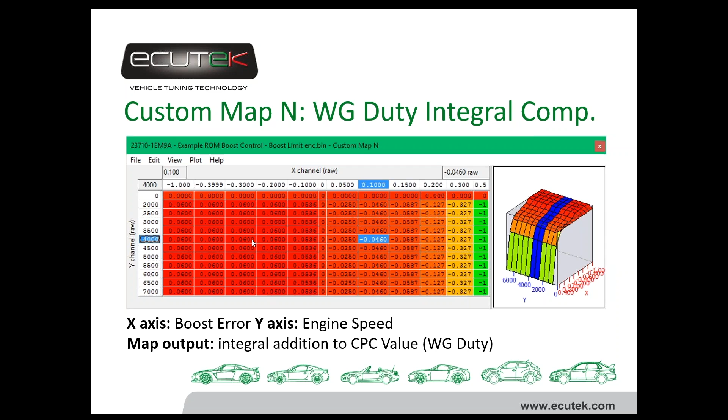This calculation is added each time the ECU cycles. So very quickly, minus 0.05 will become a value of 1, and then minus 1, and then minus 2, minus 3, and it would slowly reduce the wastegate duty. If we have a huge overboost, we have a very big value. If we have a small overboost, if we have a small underboost, the integral ramps up very slowly, very steadily. We don't want it increasing quickly because we can create an overboost. So custom map N is our integral.

So if we go back and we open our boost control example ROM, and we go to custom map N, we can see the custom map N is only allowed to work against custom map L result. Custom map L is boost error, and the map's only active between the two threshold values. So the threshold is minus 0.2 and plus 0.2. So the integral is only allowed to work when the boost is within 0.2 bar of the target.

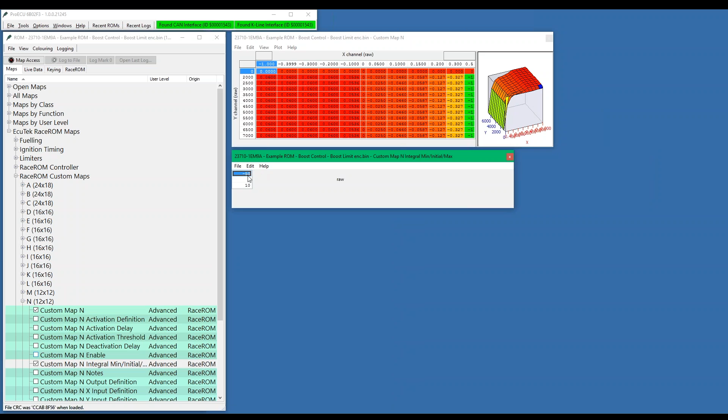This will stop the integral ramping up during offload conditions. It will only start to work when the target is near the actual. It's quite an important feature. You also see that the integral can remove 50% wastegate duty, but it's only allowed to add 10. Each time the map activates and deactivates, the integral will start from 0. So it can remove 50% wastegate duty, and it can add plus 10.

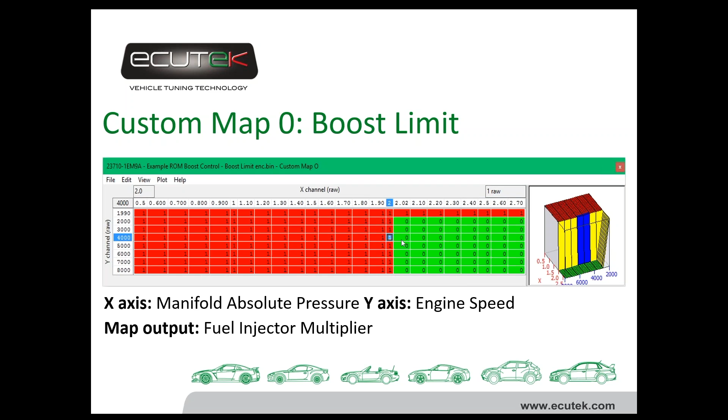We can also create a boost limit. Custom map O is our boost limit. The important thing to note here is the step value in the x-axis. X-axis is manifold absolute pressure, y-axis is engine speed, and the map values multiply the fuel injector size. So at 2 bar absolute, injector size is multiplied by 1, it doesn't change, but at 2.02 bar of boost pressure, it's multiplied by 0, instantly reducing the injector to 0, so shutting off the injectors basically.

Okay, so that's defined on page 58 of the GTR and 370Z tuning guide, and the important thing is the step value to ensure it's an instant fuel cut. We don't want to interpolate between 2 bar and 2.02 bar, so if we get 2.01 we're going to end up with injector size multiplied by 0.5, which would actually make the car go rich. Okay, next example.

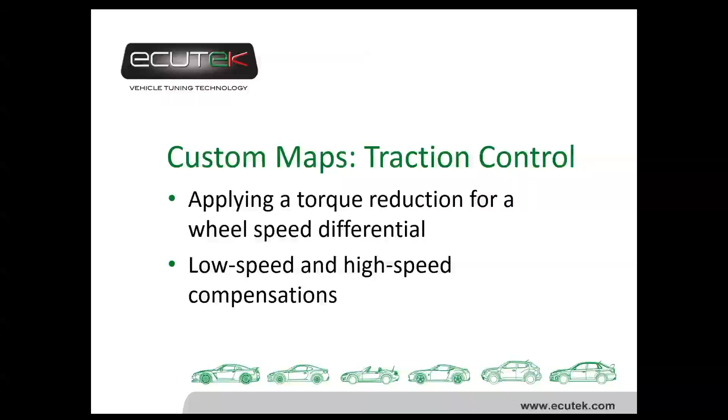Custom maps traction control. Applying a torque reduction for a wheel speed differential. Low and high speed compensations can also be added. So with traction control, we've done two simple examples here that are on EcuTek Update, and how we can use RaceROM to set up traction control.

So for a given engine speed, the x-axis is RPM, engine speed, the y-axis is wheel slip ratio, how much wheel slip we actually have between the front and rear wheels. And the map output is ignition retard amount. So traction control is defined on page 56 of the tuning guide, and you'll see that custom map D, the output of the map is ignition timing, and it will add the retarded value depending on the engine speed and the wheel slip amount.

Very simple map. Custom map E is a throttle traction control map. So same X and Y axis, engine speed versus wheel slip ratio, and it's a throttle multiplier. So the output of custom map E will close the throttle for a given wheel speed differential. It's a throttle multiplier.

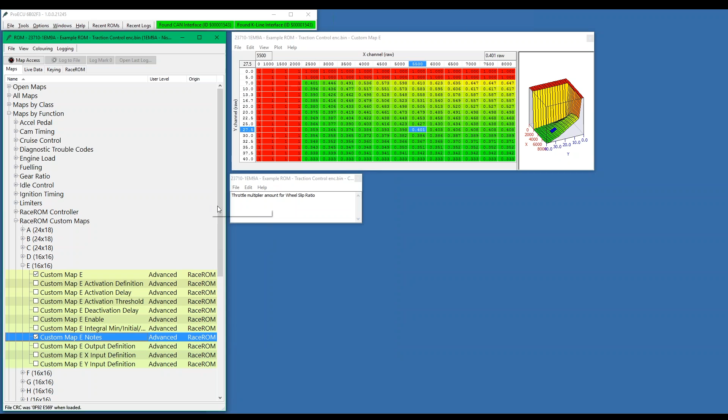So when we go to custom map E, we can see at 5,500 RPM, 27.5% slip ratio, that the current throttle angle would be multiplied by 0.40. So it would be reduced by 60%. Output throttle target multiply. In custom map E notes, throttle multiply amount for wheel slip ratio.

On the traction control, we can also put a weighting factor in. We can use a dash mounted potentiometer. We can import it through maybe a CPC voltage sensor. We can set up a weighting factor on the ignition retard or the throttle control, or both, for a given 0 to 5 volt input.

So just like we can import the flex fuel sensor, we can import a potentiometer signal, and we can dial that up and down, where maybe at 0 volts none of the traction control maps work, and at 5 volts 100% of the maps work. This gives the driver control to be able to adjust the traction control himself. You could also put a weighting factor on per map switch mode, so you could set up a less aggressive traction control in mode 1 and a more aggressive traction control in mode 4, for example. It's very flexible, lots of things you can do with it.

You can also put weighting factors in for vehicle speed, so as the car's going faster it has less of an effect. Last thing you want on a 130 mile an hour bend is that the car just pulls all the power back and closes the throttle when the car starts to slip, whereas for start off you probably want to pull the torque right back to kill wheel spin, but at high speeds that might not be what you want to be doing.

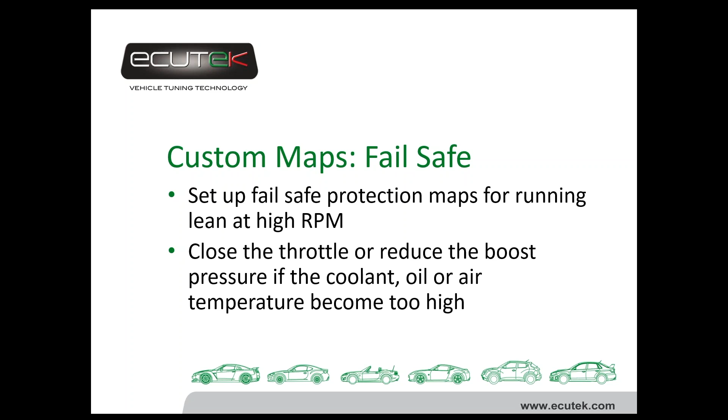Fail-safe. So we can use custom maps to set up fail-safes. Fail-safe maps will protect the engine from running lean at high RPM. For example, we can close the throttle, we can reduce the boost pressure if the coolant, the oil temp, the air temperature becomes too high. We have some example ROMs on EcuTek Update. Custom map G is for fail-safe AFR. Custom map G fail-safe AFR is shown on page 59 of the 370Z tuning guide.

You can see the x-axis is AFR bank 1 and the y-axis is AFR sensor bank 2, and basically the step value again between 13 and 13.1. The output is the throttle multiplier, so if the AFR on either bank is leaner than 13 to 1, then the throttle will be reduced. So we need some activation for this, because at transient conditions and part load we don't want this map working. So let's have a look. Custom map G failsafe.

That's traction control. That's boost control. So the failsafe and gauge hijack are in the example ROM closed loop fueling, and failsafe AFR is custom map G. And we can see the map is only active when the engine load... Map is only active when the channel value is above the threshold. So let's see what the threshold is.

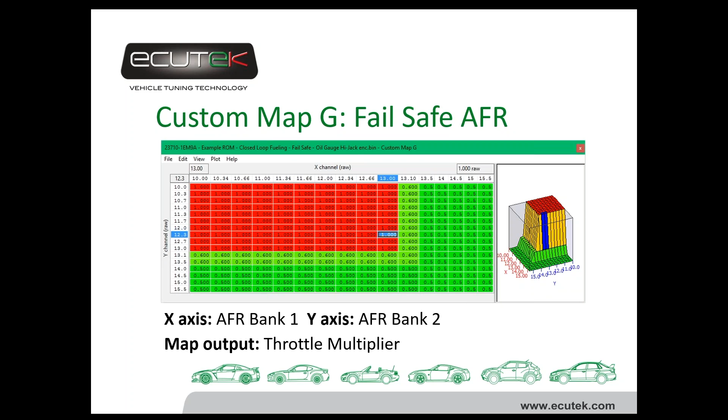So that's fail-safe AFR when we're leaner than 13:1. With the fail-safes, we can also do other fail-safes for coolant temp, oil temp. You know, as we say, the oil temp gets too hot, coolant temp gets too hot, we can protect the engine, let's say. There's many things we can do.

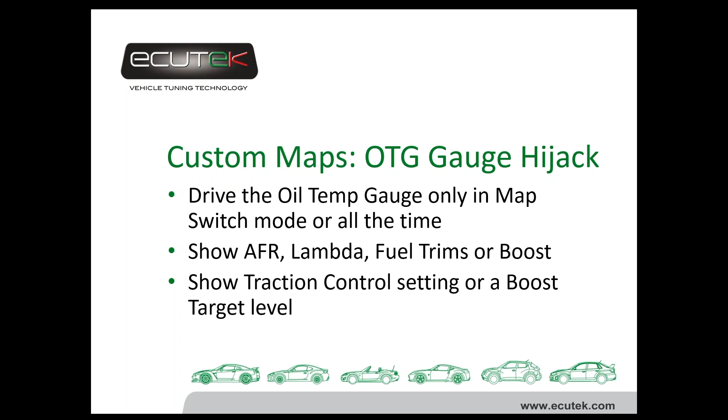Oil temp gauge hijack. So this is quite tricky to set up, but we can drive the oil temp gauge. We can do it during map switch mode or all the time, and we can show AFR, lambda, fuel trims, or boost pressure. We can also show the traction control settings or boost target. Now the gauge hijacks are defined on page 57. And we've configured in the example one, custom map I is an oil temp gauge hijack for AFR.

So because the gauge doesn't show 13.5, but it does show 135, we have to use our imagination for looking at the AFR. So our oil temp gauge goes up to 150. So with lambda 1, 14.7, 147 on the gauge is indicating 14.7. In this particular instance, we have bank 1 AF sensor on the x-axis and bank 2 AF sensor on the y-axis, and the table has been calibrated so that it will always report the leaner AFR. In this instance, bank 2 is 12:1, bank 1's 13:1. The output would be 13:1, showing the leaner of the two AFRs.

And custom map I has been output to display on the oil temp gauge. So that's shown on page 57, gauge hijack. The AFR hijack is actually on page 58 of the tuning guide. Custom map I enabled in mode 4. AFR shown on the oil temp gauge in mode 4. The output of the map is calculation 2, and it will be multiplied so it's stored correctly. Bank 1 is the x-axis and bank 2 is the y-axis.

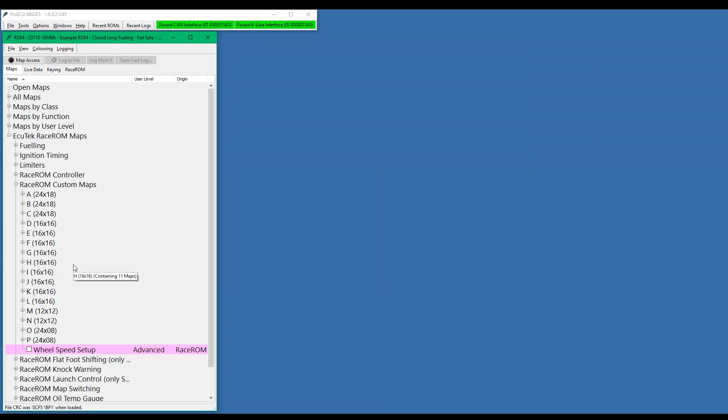So custom map H is the short-term fuel trim. So oil temp gauge hijack. Custom map H shows fuel trim. So x-axis is short-term fuel trim bank 1, y-axis is bank 2, and the output is stored as calculation 1. Remember that map I is stored as calculation 2. Okay, so the output of this map is the short-term fuel trim. When the fuel trims are 100%, the oil temp gauge will read 100. When the fuel trims are 115, the oil temp gauge will read 115. But if bank 1's 115 and bank 2 is 100, it will read the higher value. So it will always show where it's adding the most fuel trims.

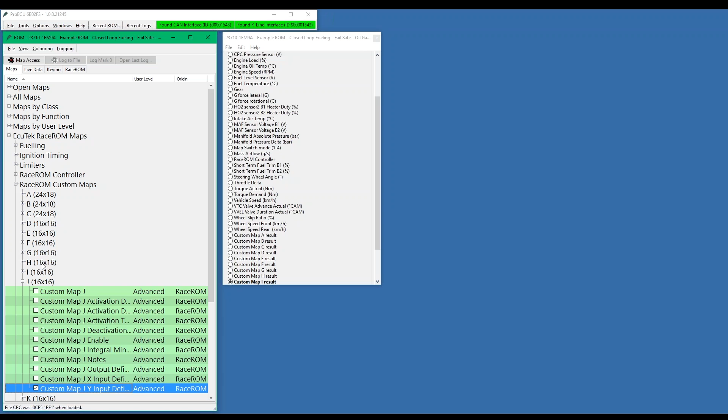So custom map H is short-term fuel trim. Custom map I is AFR. And custom map J decides which of these two to use. So it's been enabled in mode 3 and mode 4. And this defines if the fuel trim short term or AFR is shown on the oil temp gauge. So as we come down, the x-axis is the output of custom map H, and y-axis is the output of custom map I. So as we look at custom map J, it's quite unusual because the decision is whether it's displaying H, the fuel trim, or I, the AFR.

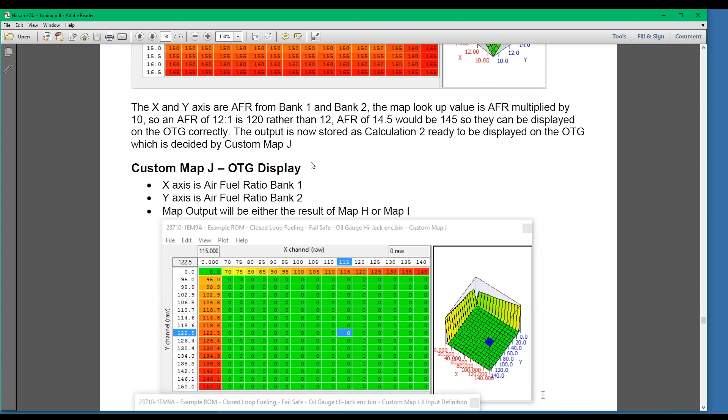And depending on which map switch mode is enabled, because custom map H is enabled in mode 3 and I is enabled in mode 4, it will only display one of the outputs. So this way we can control the oil temp gauge to show either of the two hijacks. So that's defined on page 58 of the tuning guide. So H is the short-term fuel trim, I is the AFR hijack, and J decides which one of the two maps is displayed on the oil temp gauge. So that brings me to the end of the custom map section.